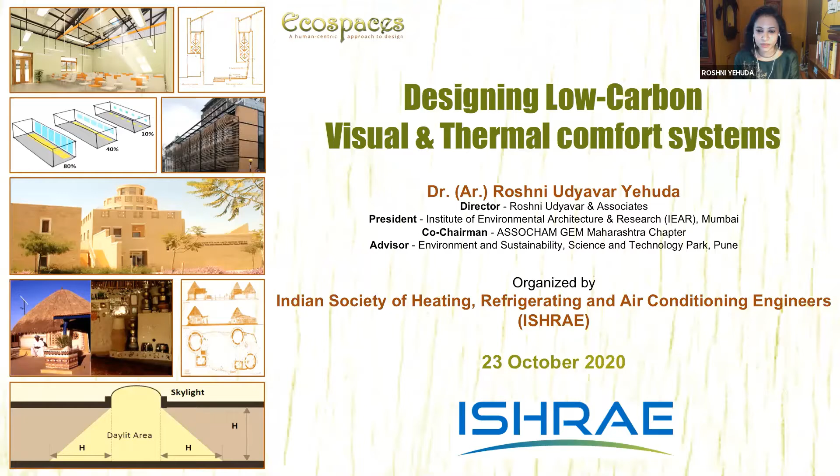The topic I'll talk about is eco spaces: designing low carbon, visual, and thermal comfort systems. By itself a very big topic, so please pardon me, I'll just be going through patches of it. What I'll cover today is a bit of background on why we need to do these things, energy efficient building envelopes, thermal comfort, visual comfort, and probably one case study. I actually had more, but I deleted most of it because I think we'll be short of time.

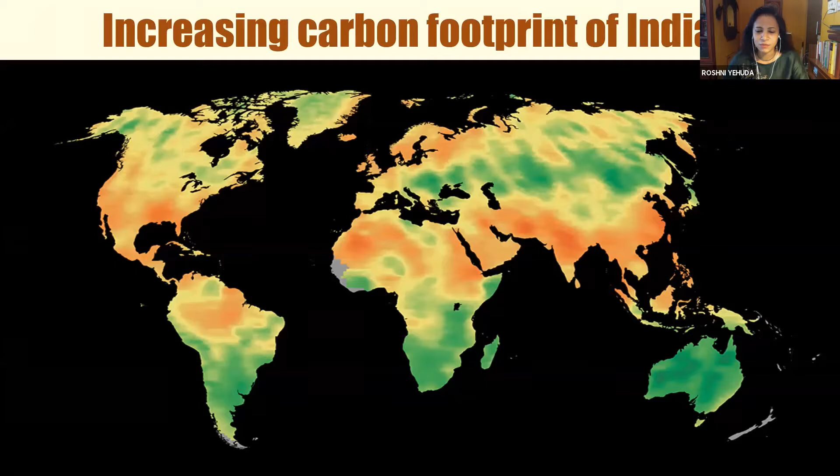So let me start by saying that the need for this is that we all know climate change is not just imminent, it is here. Being a developing country, our carbon emissions are on the rise. We are one of the topmost in the world, maybe fourth. If you look at China, it's almost reached the top now — it has gone past the US, and we are fourth.

That's even though our per capita carbon emissions are low; overall we are still very high because of the huge population. We know the effects of these carbon dioxide emissions: the glaciers in the Himalayas are melting, and overall this is causing a change in the climate of the entire Earth. All the ecosystems are getting affected, the oceans and everything. We can see it in the weather patterns. It's now a fact — no longer are people questioning it.

So if you look at the future, what are the challenges for us? The IPCC has shown us that if we want to limit global warming to 1.5 degrees centigrade, we have to follow a very drastic step down from our current levels.

This is our current level. If you want to limit the overall rise in global temperature to 2 degrees centigrade, which itself will have many global ramifications — many islands will be underwater, maybe even Mumbai — then we'll have to reduce to a certain extent. But if we go along the current path, we are definitely not going to survive.

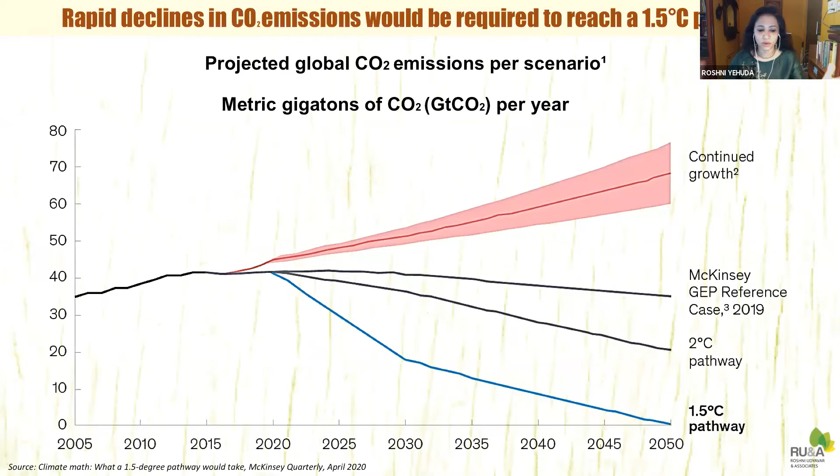So it seems we will have to make drastic changes, not only to our buildings but also to our behaviors — in every little thing of life. We'll have to move away from getting used to energy-rich spaces, and look at designing and making everything low carbon.

I just want to quickly give you some facts about India. Our floor space of buildings is expanding, and by 2050 we're expecting about 35 billion square meters of new buildings, yet 60% of that is not yet constructed. As per some older data, buildings still account for 38% of total electricity consumption, of which 28% is residential or domestic and 10% is commercial.

Some more facts about electricity consumption: the biggest rise is going to be in the residential sector, where by 2032 we're going to see that 37% alone is going to come from the residential sector. This increase is also because of the use of air conditioning for cooling and thermal comfort — fans and space cooling are today the largest, 33 to 65% of electricity consumption. Electricity demand due to the residential sector is going to keep rising.

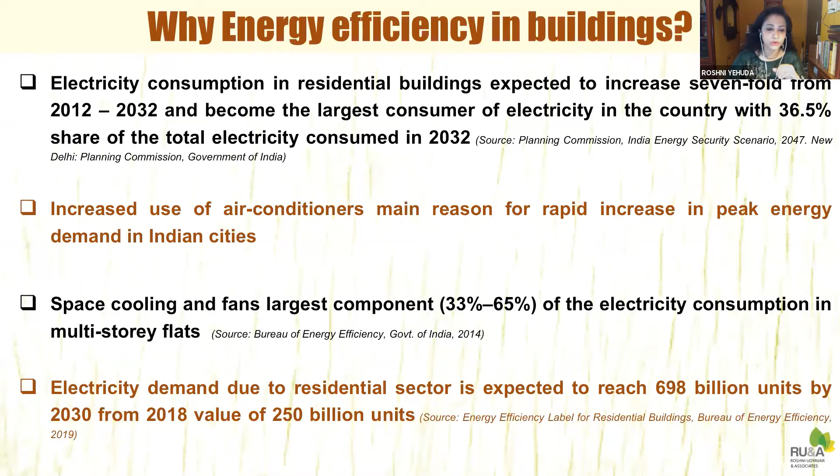Given the number of people we have to accommodate, people are going to move from villages to tier 3 cities, tier 2 cities, and so on.

Overall, buildings have many impacts, and key among them is energy consumption. During the operational phase, buildings consume a lot of energy, amounting to almost 50% of global greenhouse gas emissions. Apart from that, we haven't even counted the materials, the water we consume in buildings, and the waste generated — not only municipal solid waste but also demolition debris. So all of these are impacts of buildings.

So if you look at the built environment overall, it is next only to agriculture in its impact on Earth's ecosystems. So we — as architects, interior designers, MEP consultants, whoever — have drastically changed the face of the planet in many ways, and we need to change that. We need to reduce our fossil fuel emissions — oil, coal, and gas — and start designing low carbon buildings.

When we talk about low carbon design, especially with respect to thermal and visual comfort, I want to give a few areas you can focus on. One is the efficiency of the equipment we use—lighting, HVAC, computers—how efficient we can make them. The second part is the building envelope itself, which I'll talk about to a large extent today. The third part is to substitute the rest of the energy with renewable energy.

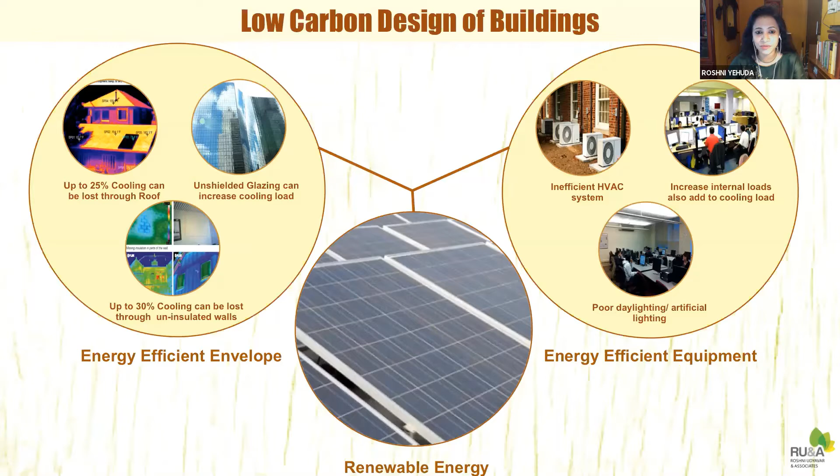I want to give a larger framework for how you can make low carbon buildings. The building has to be made as per the climate of the place—then it will definitely be low carbon because it responds to the climate, so it's not just a block that can be fitted anywhere. It responds to the thermal and visual comfort of the occupants, so it's not a generic design. Finally, how we can reduce and eliminate non-renewable energy and go for renewable energy—this is the whole perspective we're looking at.

In terms of the building envelope, just to give you an introduction—the envelope is like a third skin. Just like our body needs to be balanced in terms of thermal energy, we have our own skin, then we have clothes, and then we have the building. That building is like a third skin, exchanging heat from the environment based on whatever is outside, following the simple laws of thermodynamics.

Depending on the outside temperature, the building either loses or gains heat, and a balance needs to be maintained. A structure that doesn't lose or gain a lot of heat, and remains in balance, is a structure that will consume less energy.

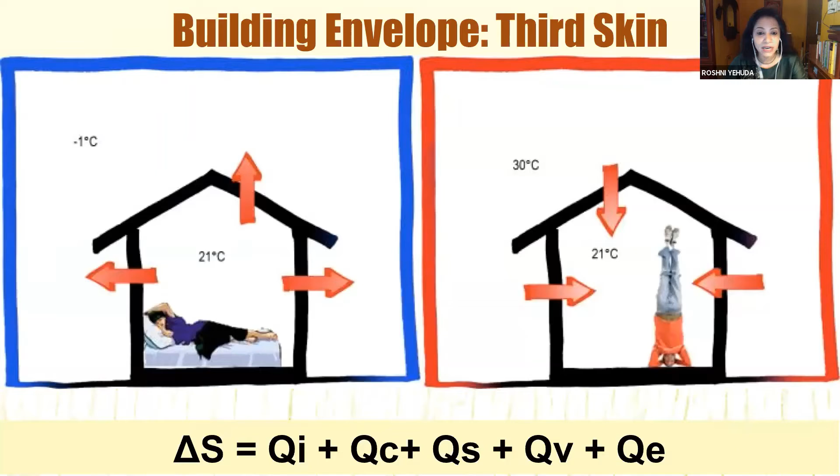If you see our own buildings of the past, we had these huge massive walls in our villages—like 2 feet thick, made of mud—and the heat could never reach the other side. By the time it would come somewhere to the middle, it would have to go back. So basically, thermal lag was used as a means of making buildings thermally comfortable.

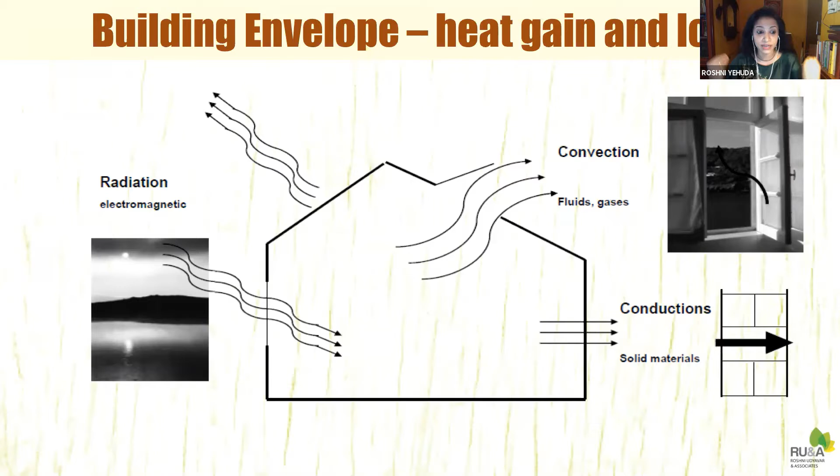I want to go a bit more into the building envelope and give you some important facts and concepts in building design. The building envelope—the floor, walls, windows, roof—keeps exchanging heat with the surrounding environment by three processes: conduction, convection, and radiation. Basically, the heat source is solar radiation from the sun, short wave radiation, which is either absorbed by the structure and emitted, or received directly through the windows, along with convectional movement of the air.

In the design of the building envelope, there are several things that can be done. For example, you already know about shading devices, which can make a drastic difference to direct heat gain inside your building. Then you can have a proper U value, or thermal transmittance value, for your walls, roofs, and windows—I'll talk to you about that in a bit.

You also need a proper solar heat gain coefficient. You can decide the window-to-wall ratio—if you recall, in Rajasthan we have smaller windows, while in Kerala the walls are almost all windows. So there's a different pattern used everywhere, and that's nothing but the same concept of window-wall ratio we're talking about. And of course, orientation—having the right orientation wherever possible—is very important.

The internal layout is important too, because if the habitable spaces are not in the direct path of the heat zone, that will be much better. So if you have buffer spaces like balconies, verandas, or even toilets or staircase blocks, that's another way of looking at it—that's the spatial layout.

So in terms of walling materials, I want to give you a brief background. So far, this is what we use: fired clay bricks, which we've been using since Mohenjo-daro and Harappa, and concrete blocks, which is currently in practice but not at all good. We also have Mivan shuttering kind of walling, which extensively absorbs and retains heat inside structures. We have hollow concrete blocks, somewhat better than concrete blocks, and then AAC blocks, which came up in the last decade or so and is probably today the most energy efficient material in the market.

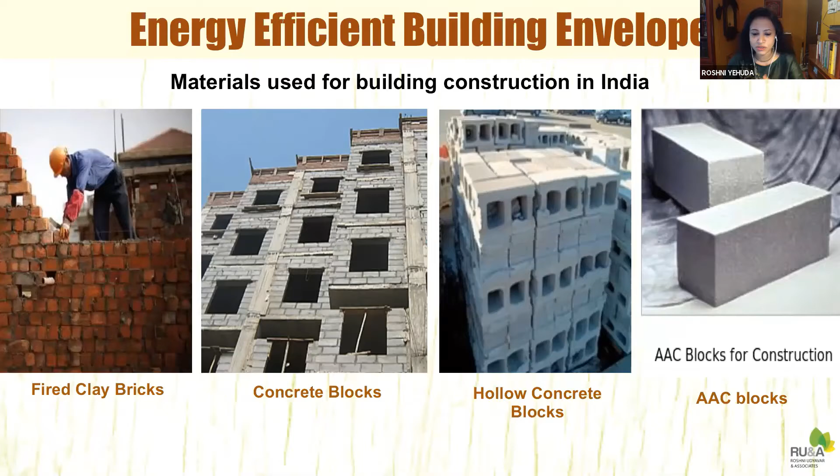But AAC with insulation comes down to 0.4. So it's very important to get this value right in your building in order to keep the operational energy of the building low. You'll automatically see that when you use the right materials, the building's energy consumption comes down.

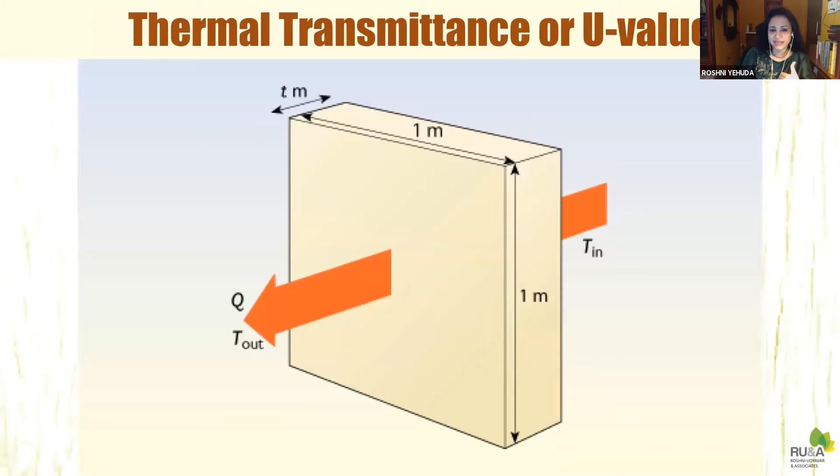So I want to give you a little bit about thermal transmittance, or U value, which is basically the amount of heat energy that gets transferred by one square meter of wall of a certain thickness, given a one degree centigrade difference between the two sides. U factor is defined as heat transmission in unit time through unit area of a material, and it also includes the thin air film on both sides of a material - whether walling, glazing, or roofing - which is taken into consideration in this U factor.

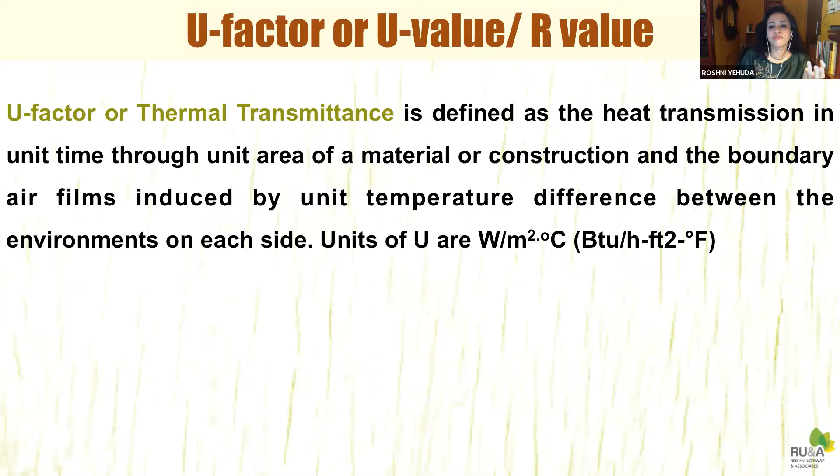So basically, U factor is one criteria which takes into consideration conduction, convection, and radiation effects. Therefore it's a very appropriate, easy way of finding out whether a material is good or not in terms of thermal behavior. The way we calculate U value is by calculating thermal resistance, which is the exact opposite of thermal transmittance.

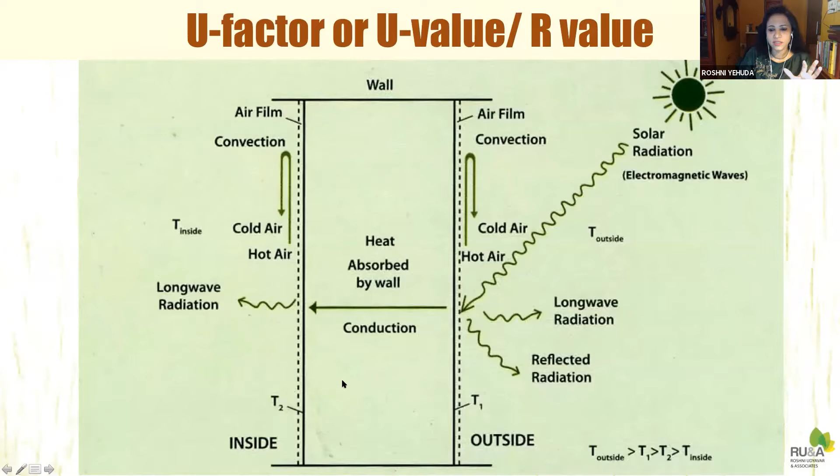So here you can see a wall, and this is the shortwave solar radiation hitting it. This is the thin film of air which has its own temperature and effect. Some part gets reflected, which is not our concern. Some part gets converted to long wave radiation, which is a concern because it becomes heat. Most of it gets conducted inside the material itself, heating up the entire structure, and the rest goes inside, emitted as another type of long wave radiation, which is also a concern. So this U value takes most of these things into consideration, and therefore it's considered an appropriate value.

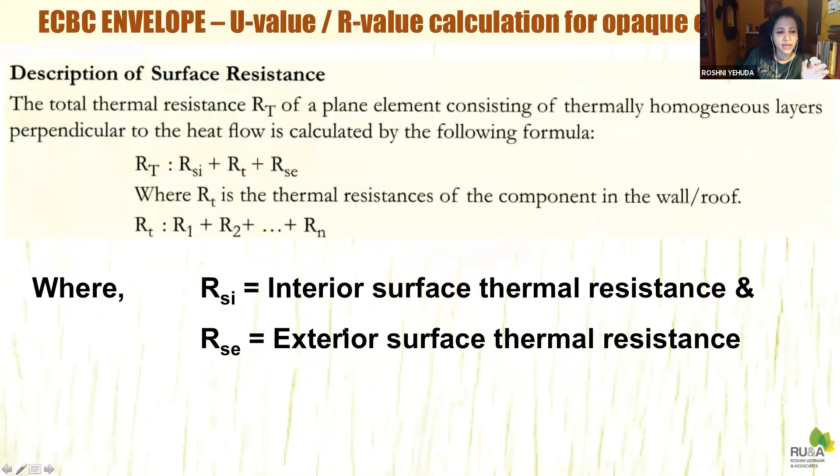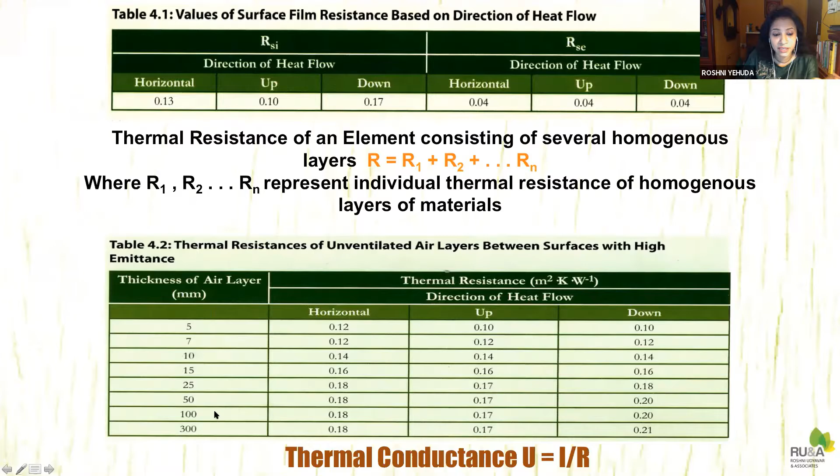Now the calculation of U value goes by calculating thermal resistance, which is directly proportionate to the thickness and inversely proportionate to the thermal conductivity of the material. So R equals D upon K. Without going into the details, you also add RSI and RSE, which is the thin air film resistance provided by the air film next to the walling. These are the values given by the Energy Conservation Building Code for RSI and RSE, and if you have a cavity in between, those values of thermal resistance are also provided in ECBC.

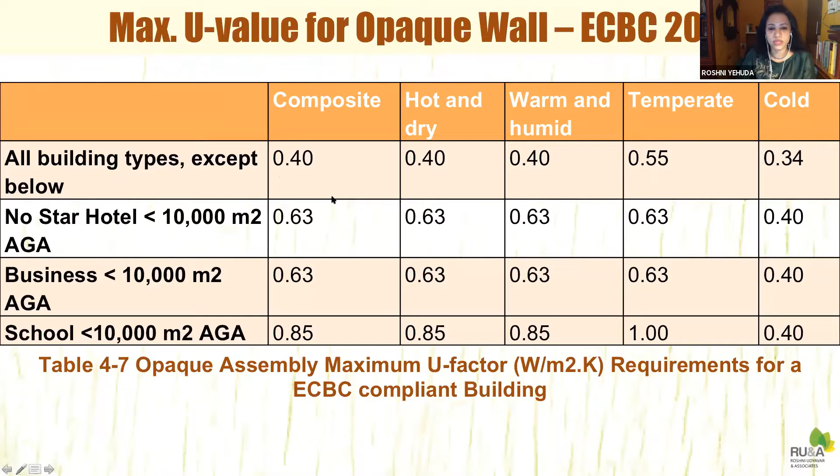Just to give you a quick chart of the values given by the Energy Conservation Building Code 2017, you can see that 0.4 is given for most climatic zones. For temperate, we have a slightly higher value, and for cold regions, it is slightly even lower than these. So this is what ECBC prescribes.

Another important factor related to roofs is the solar reflectance index. Again, it is the amount of heat energy which gets directly reflected. It also includes somewhat the effects of emissivity and reflectivity, and it's a range between 0 and 1, or it is also expressed as a percentage.

For example, if you have red colored tiles, the reflectivity is 30 to 50%, meaning 30 to 50% of the heat energy gets reflected. Whereas if you have dark asphalt, bituminous sheet, or some kind of paint, then it is between 10 to 20%. Or if you have whitewash or white paint, which is high albedo reflectivity like snow, then this is 80 to 90%. So that drastically reduces the overall amount of heat coming inside the structure.

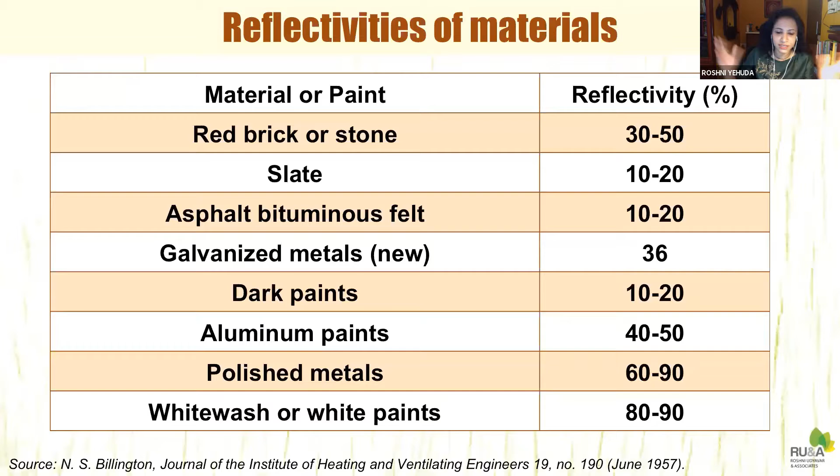That means 70% of the heat should be reflected. And if you are not providing a painted surface or something, then you have the option of providing greater than 50 mm high vegetation covering the entire roof.

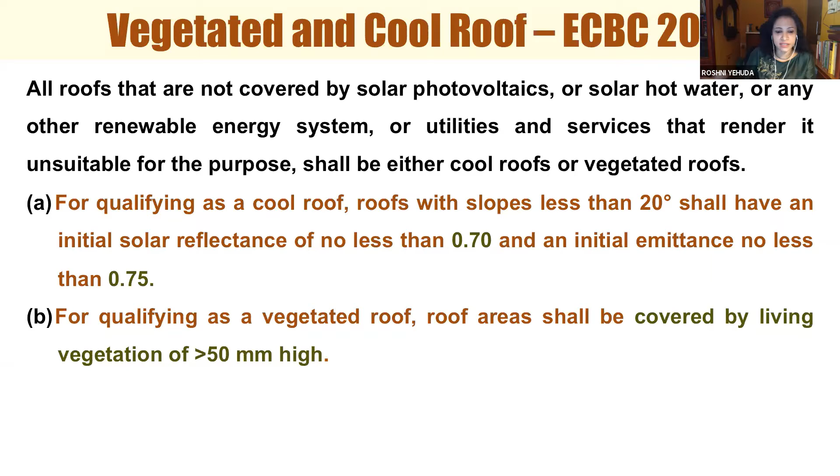So you can do various things here. For example, you can have an extensive garden on your roof, or a small lawn covering the roof, or you can use China mosaic, which reflects the entire energy. Or you can also have radiant barrier materials under the deck of the roof, or even on the other side. So you have various options for making your roof.

Remember that the roof is the largest horizontal surface taking in heat energy. Not so in the case of high-rise buildings. In high-rise buildings, the walls become really important.

Now coming to windows, I want to tell you that in windows also we look at U value as a benchmark for finding out how good that window material is. Here I want to show you an example: if you have a 4 mm float glass, the U value of that is 5.8.

If you estimate that 40 degrees centigrade is the outside temperature, this provides very little resistance. You can see the inner temperature is 39 degrees. So there is just a 1 degree drop in temperature.

As compared to that, if you take a clear DGU, double glaze unit, which has 4 mm glass, a 12 mm gap, and another 4 mm glass, that brings down the temperature to 36 degrees. The U value of this is 2.9.

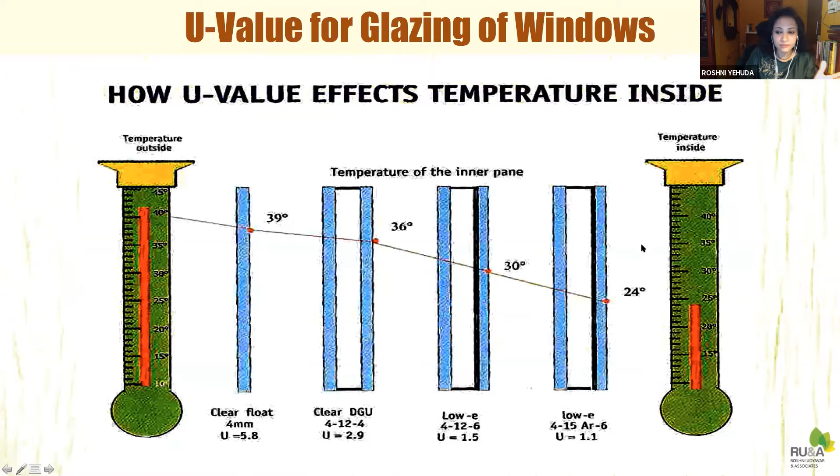you can do lots of things by having a glazing of the correct U value. In many cases, you may not be able to avoid glazing today. In the past, we did not use glazing much, but today as we are going higher, we need the view factor, etc. Therefore, if you want to put a lot of glazing, it is best to restrict it to at most 40% or so, as ECBC prescribes. But if you go higher than that, at least you need to ensure you have a proper U value, and in any case, you can have a good U value for the glass.

The second most important thing with respect to the glazing material is called solar heat gain coefficient, which is related to the direct solar radiation, and it's a ratio of how much heat is outside and how much is inside from the solar radiation. So it's again a value between the range of 0 and 1, and it takes into account all of these aspects: the direct radiation, what is absorbed, what is reflected, what is re-radiated, and everything.

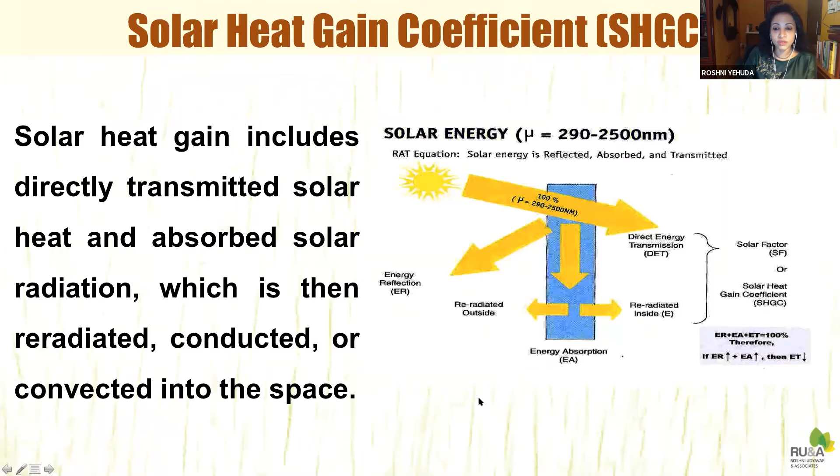So when we think about buildings and how we orient them, what is really important is the orientation of the openings and the glazing. So if you can protect your openings by providing the right kind of shading, then the solar heat gain coefficient will be low, and that is what you need. You definitely require more than the U factor. In the case of windows, what is important is solar heat gain coefficient.

The third important thing is window to wall ratio, which is, given a certain area of the wall, what is the percentage of window. So window area divided by wall area will give you the window to wall ratio. And it can be various percentages. So in a warm and humid climate, probably it is best to have more windows, good cross ventilation, etc. Whereas in a hot and dry area, you may want to have smaller windows. That's what window wall ratio is about.

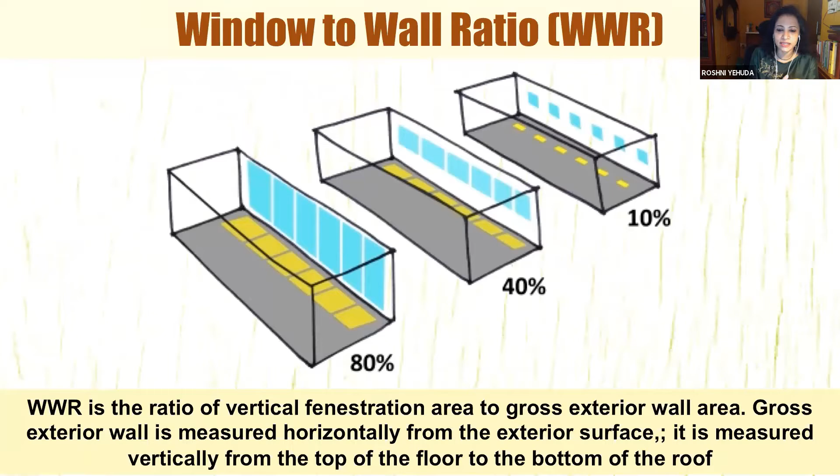The next thing is visible light transmission. How much light can transmit from a window? And this is again a percentage of how much light is outside and how much is coming inside from the glazing. And again, it's a value between 0 to 1 or 0 to 100%.

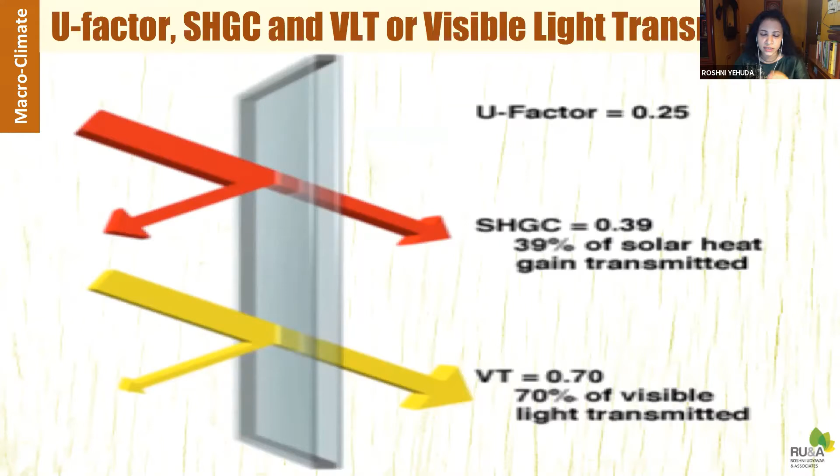So if you take a glazing, there are three very important things. One is the U value, which we already saw, the rate of heat transmission; the solar heat gain coefficient, which is the direct solar radiation entering inside; and the third thing is the visible light, how much light you're getting inside. Remember, the U factor is the non-solar heat. It's based on the difference in temperature.

So this is how I would summarize it. U value is the rate of heat transmission, solar heat gain coefficient is the heat gain due to radiation, and VLT is the rate of daylight transmission. So we need less U value, less SHGC, and more VLT. This is a typical glazing performance chart, and you can see I've highlighted the light, the solar heat gain coefficient, and the U value.

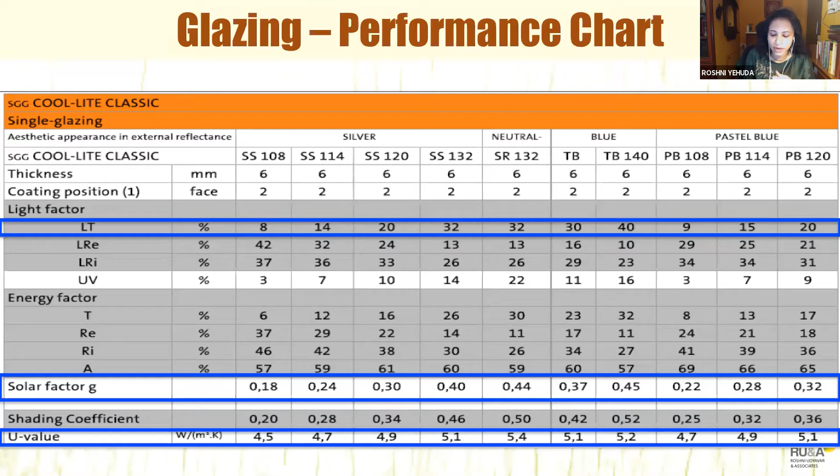And you definitely need to strike a balance here, because some glasses will provide very little light transmission, like 8%. Their solar heat gain coefficient may be also low, but we don't want so little light coming in, so at least 20%. So you need to strike a balance and select your glazing such that you will have low solar heat gain coefficient, low U value, and high light transmittance.

The role of shading, as I have already told you, has one main purpose: it will reduce your overall heat gain, and it is characterized by a projection factor of the shading device that you can design. And most architects can design a shading device if they know two very important angles, the horizontal shadow angle and the vertical shadow angle.

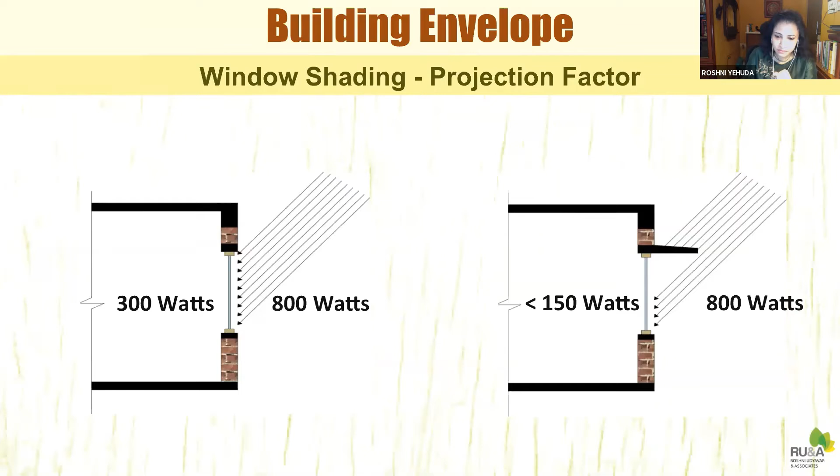And you can see from this diagram that if you provide a shading device, you can directly cut off a big percentage, almost half of the direct solar radiation coming inside. And if you want a certain amount, you can design a shading device which is retractable, movable, or flexible. So as I told you, you can design your shading device if you know these two simple angles, vertical shadow angle and horizontal shadow angle, which can be easily found for any latitude, any place.

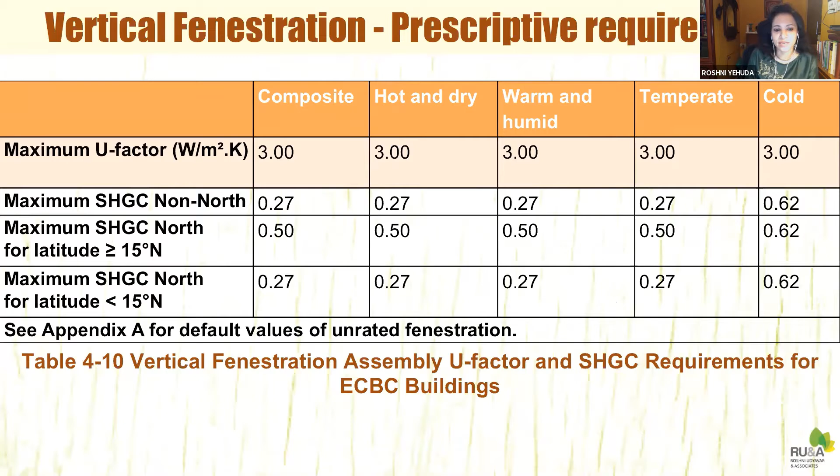As far as vertical fenestration is concerned, I also want to show you what ECBC prescribes. The maximum U factor is given as 3. If you buy a typical glass off the shelf from a vendor, the U value may be as high as 7, so what ECBC prescribes is 3. This is quite difficult, but that is what is expected. Similarly, solar heat gain coefficient is about 0.27, that is 27%. So to summarize, we should have a window to wall ratio which is less than 40%.

Visual light transmission should be about 0.27, and the rest of the things I've already mentioned to you, the SHGC, the U factor, and all of those.

Coming to the next aspect, that is thermal comfort. So I just want to quickly take you through some of the important concepts. When we design buildings, we want to design them for comfort of the occupant with respect to all of these aspects: visual, acoustics, spatial, thermal, and animate. Thermal comfort is just one of the aspects, and it's not necessary that if you provide thermal comfort, all of the rest are also done. So you need to be aware of this fact.

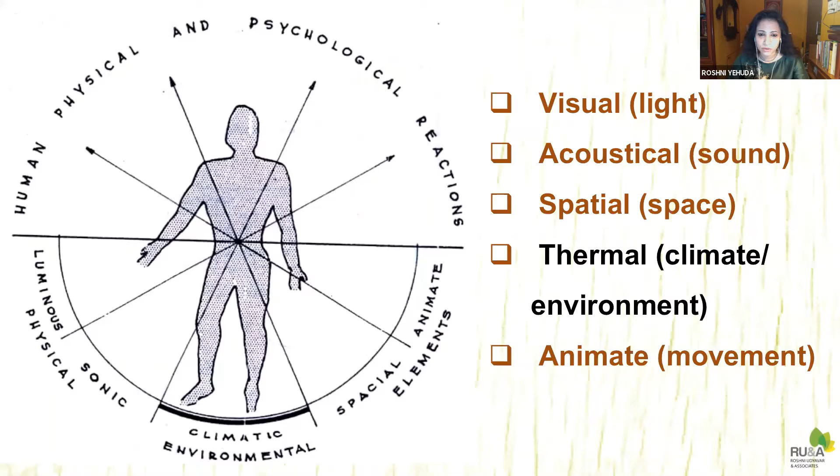And we as human beings have ways of exchanging heat with the surrounding environment, and it is based on the activity levels, whether you're sleeping, whether you're sitting on the computer, whether you're doing a workout, or whether you're doing an office activity or whatever it is. So all of these things are very important.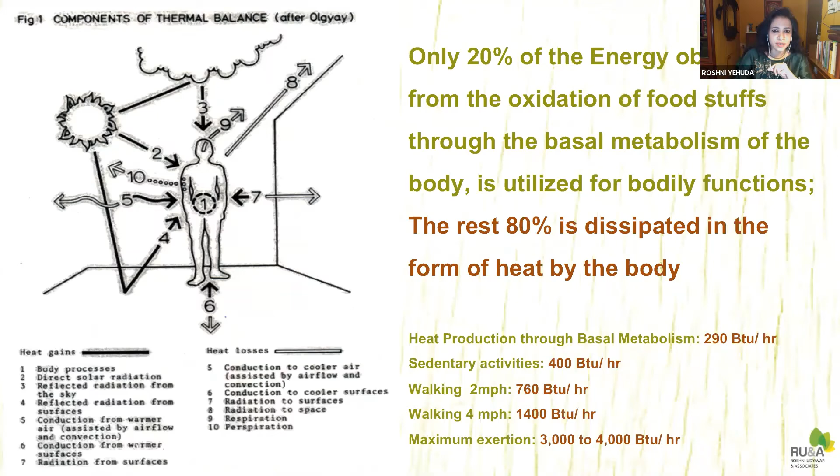For a very long time, there was a search by scientists as to what could be called a comfort zone, wherein people feel comfortable. Can buildings be made for a particular comfort zone? And it was found that a comfort zone is one where people have maximum productivity. They are able to do most of their work without feeling exhausted, tired, and so on. That's because the external environment is not playing a role in their physical comfort.

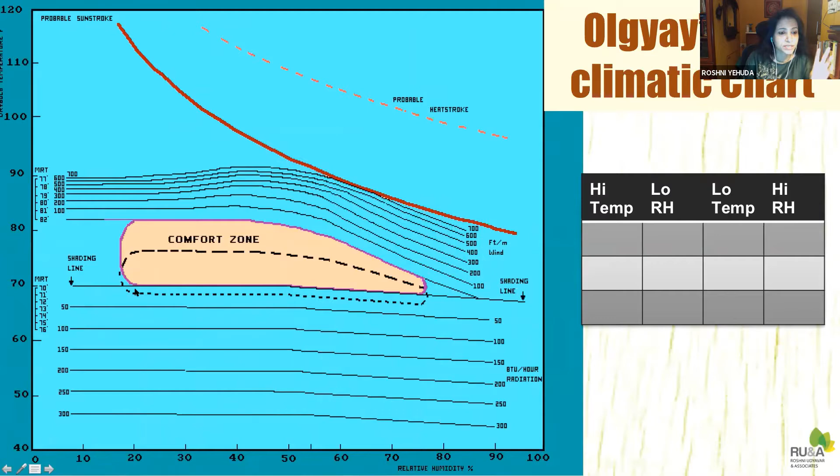So this is one of the first charts designed by Olgyay, which shows you two aspects, that is relative humidity on the x-axis and dry bulb temperature on the y-axis. And this area in the center was the comfort zone. Of course, this was originally designed for the USA, but Olgyay also prescribes how to change it for tropical climates. All you need is to mark your particular place using high of temperature and low of humidity, and you will know what you would need to do in your particular place.

For example, some places you would not need shading, you would need solar radiation a lot. In some places you would need to provide wind. In some places you will need to provide moisture. So there are different recommendations for thermal comfort by this particular bioclimatic chart, but there are many more climatic charts that have been done. ASHRAE describes thermal comfort as a state of mind that expresses satisfaction with the surrounding environment.

So although we have spoken so far about feeling physically comfortable, basically thermal comfort is a mental state. It's a state wherein I feel comfortable or you feel comfortable. There are different variables of thermal comfort, that is metabolic rate and clothing insulation. These are the personal individual variables. As far as the environment variables are concerned, we have air temperature, radiant temperature, air speed, and humidity. And there are other secondary factors as well.

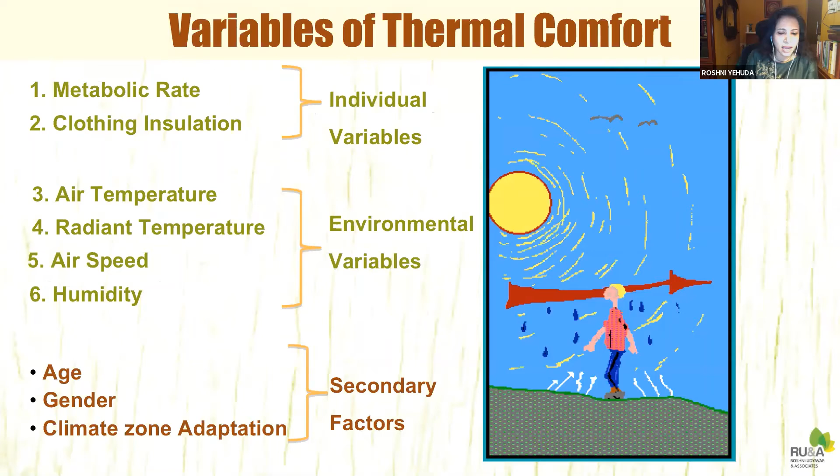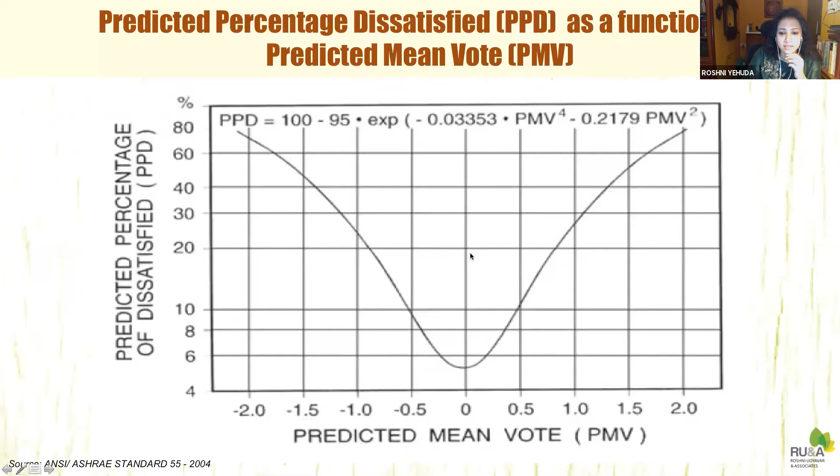And what it says is that the percentage of people who would be dissatisfied would be only about 10%. So they would fall in the range of 0.5 to minus 0.5. Most of the people should be here. There may be a few people in the higher range of -2 or +2, that is they're feeling too warm or too cold, whereas most of the people should feel in this range, that is neutral, warm, and cool. So this is the general requirement. It says that the percentage of people dissatisfied, PPD, is less than 10, and the range of PMV is between minus 0.5 to plus 0.5.

So it also has a comfort zone here as well, wherein you have operative temperature on the bottom, you have humidity ratio, and you have a thermal comfort marking. And these are for different clothing levels, what you're wearing. So if you're wearing a jacket and a suit, it's called 1 clo. If you're wearing summer clothes, like a shirt and pants, it is called 0.5 clo. So this is the PMV graph for finding out the comfort. So you can find out whether a particular place is in the comfort zone or not.

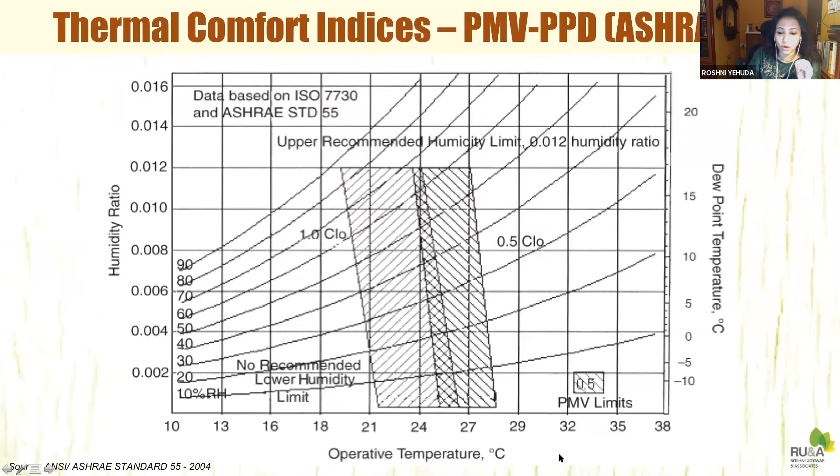In case of India, the National Building Code provides 3 different indices for measuring thermal comfort, and this is given in the NBC 2016 as well. There are 3: the effective temperature nomogram, the tropical summer index, and adaptive thermal comfort.

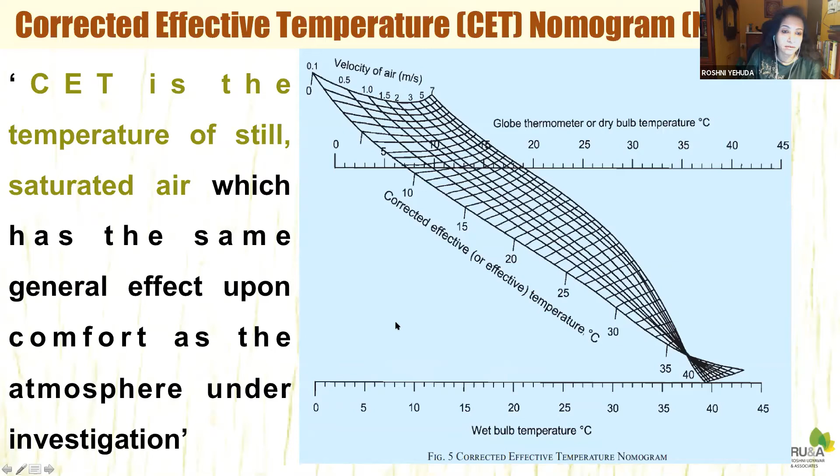So the nomogram that we have for CET also has a small part which is marked as the comfort zone. And then it has a velocity of air, it has the globe thermometer, which is basically taken using the globe temperature, the thermometer, and it is marked over here. And then you have the corrected effective temperature, which is here. So you will have to mark the 2 of these and then connect the line, and you'll have to find out what is the effective temperature because of the particular conditions, maybe the wet bulb, the dry bulb, and everything together. So this is one of the ways of finding thermal comfort levels in the case of India.

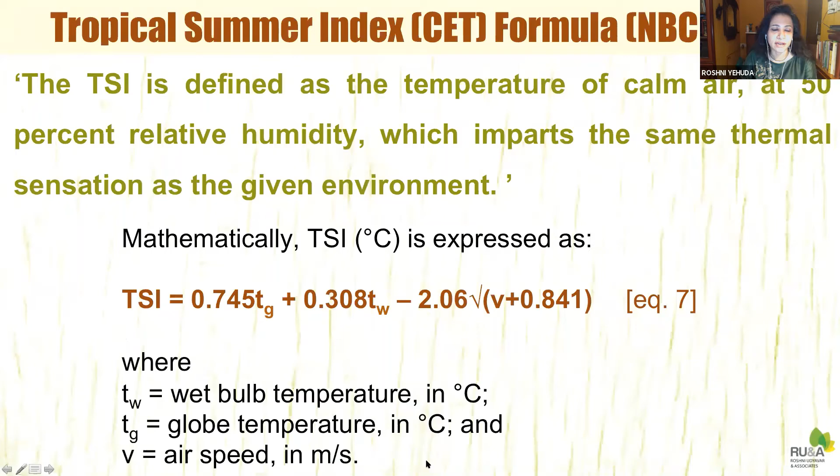The second and more suitable one is the tropical summer index, which I have used extensively, which includes, for example, the wet bulb temperature, the globe temperature, and the airspeed in meters per second. So this is another way of finding out, and the TSI value for that particular place or building will have to be between the range of 25 to 30 degrees centigrade. Optimum value is considered as 27.5, and there are limits of between 19 to 25 degrees centigrade on one side, and 30 to 34 is the extreme limit. So these are tolerable ranges on the hot side and cold side. So the tropical summer index is a very huge range of comfort levels.

So it even goes beyond the latest model that has been developed in India, which is called the Indian model for adaptive thermal comfort, created by CEPT and several other people. But now it is included in the NBC. And you can see that for naturally ventilated buildings, for different types of buildings, the values for the operative temperature, that is the neutral temperature, are provided in the IMAC.

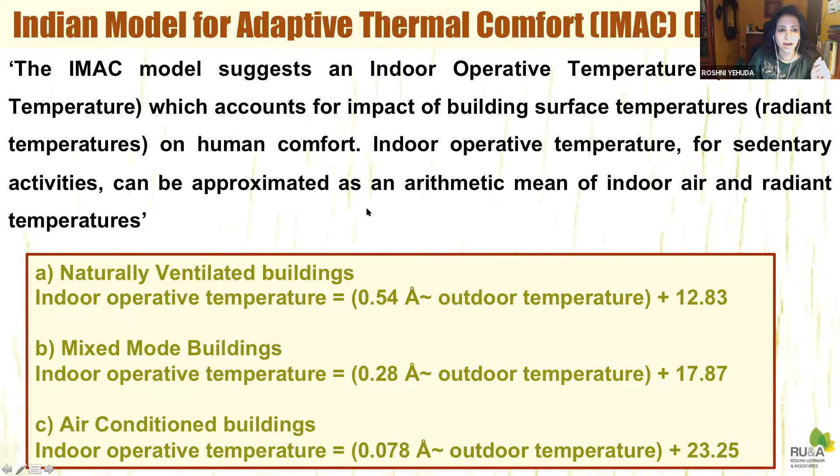Coming to visual comfort, there are 2 aspects, daylighting and artificial lighting, both of which I'll just quickly refer to. Before that, a few points that are important to understand is the illuminance, that is the light source. Every light source, whether it is the sun or an artificial bulb, will give out lumens, and what falls on a surface is lumens per square feet, which we either call foot candles or lux. And luminous intensity is the intensity of the lumens coming out of the source, and what we perceive at the eye is the luminance in candela per square meters. So all these are some of the basic terminologies.

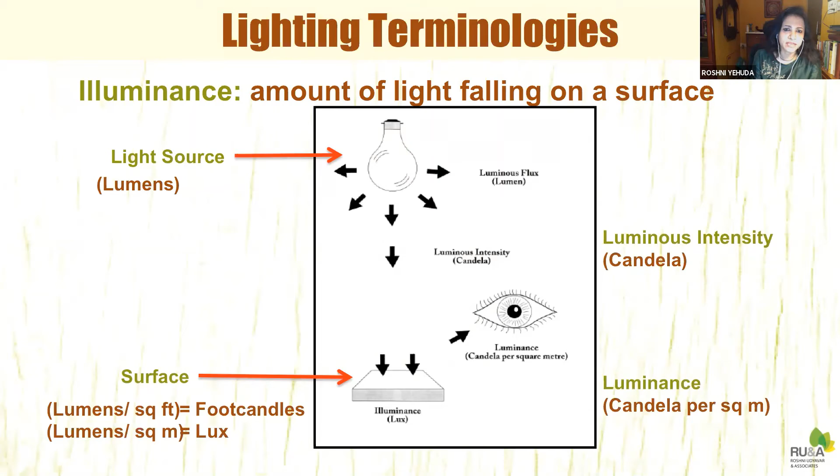Now, when we talk about visual comfort, what is required is that we have adequate levels of illumination. That is a certain lux level that is recommended for that particular task. There should be uniformity of illumination. There should not be glare. Glare is an excess amount of light falling from some source, which disturbs your eye. There should be adequate contrast. There should not be too much contrast. The colors should be as is required for that particular place, and there should not be a stroboscopic effect, a movement of light. So this is what is required for visual comfort.

So let me talk a little bit about daylight, which is basically the controlled admission of natural light into a space through windows. So we have the freedom of designing daylighting, and daylighting can be designed very accurately if you want light inside your buildings. And why we need to have daylighting is that it's a free source given to us. It's just available. The second thing is that it affects our circadian rhythm and the biological clock. If we are not next to a window and we're sitting in a place which does not give us an idea of what is happening outside, then that can be quite disturbing to our biological clock, just like when we face jet lag and so on.

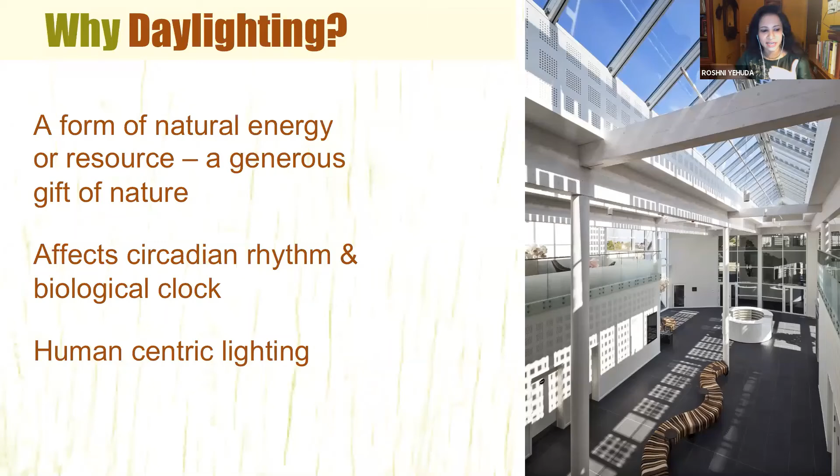So all of this together comes under something called human-centric lighting, which basically includes three aspects: health and well-being of the person, an efficient lighting system, so energy reduction, and also aesthetics. So all of these things are the goal of a good daylight design.

I would start by giving you a few terminologies or some idea of how to design.

One is the daylight factor, which is similar to the solar heat gain coefficient. It is a ratio between the interior and exterior illuminance—a percentage of how much light is outside versus how much is coming inside from your window or opening.

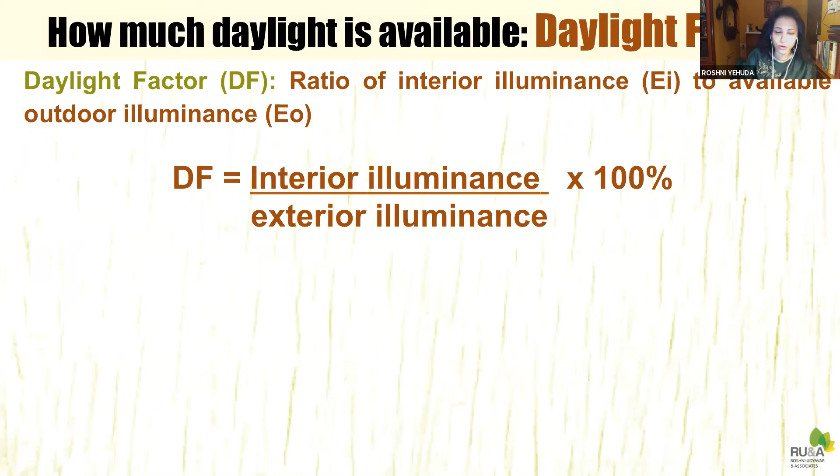The National Building Code gives various levels for daylighting, and it says that the level should be based on the clear design sky, a sky without any clouds, and should be taken at the level of a working plane, both outside as well as inside.

It has already given values for outside design sky illuminance for different climatic zones of India. If you have the interior lighting levels measured using a lux meter, you can immediately calculate the daylight factor. However, when you want to design something, you can do it using the daylight factor formula.

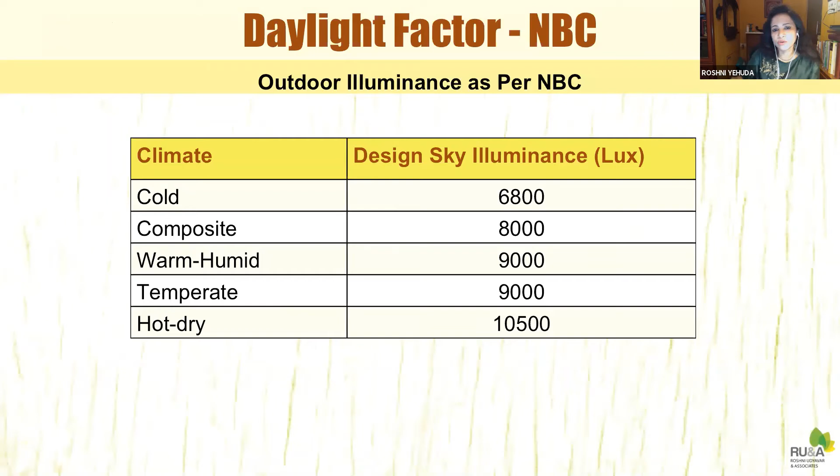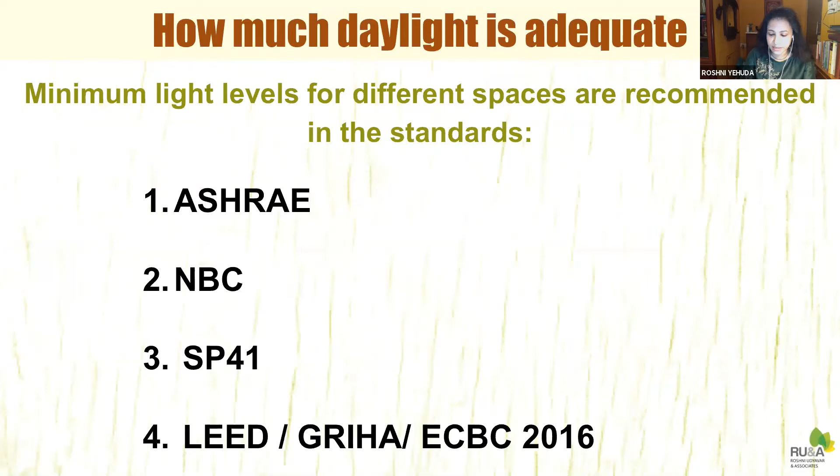The levels of adequate daylight for a given space are given by various sources, including ASHRAE, NBC, SP41, as well as various other rating systems, and also ECBC.

If you see the National Building Code, for each place you will see three values always given. We have to always take the central value because these are for extreme conditions. The higher value of the range is used when there is unusually low reflectance, when accuracy or higher productivity is required, and the visual capacity of the worker makes it necessary. The lower range is also taken for special cases. So what we need to take is the middle value as the required value of illumination for a particular place.

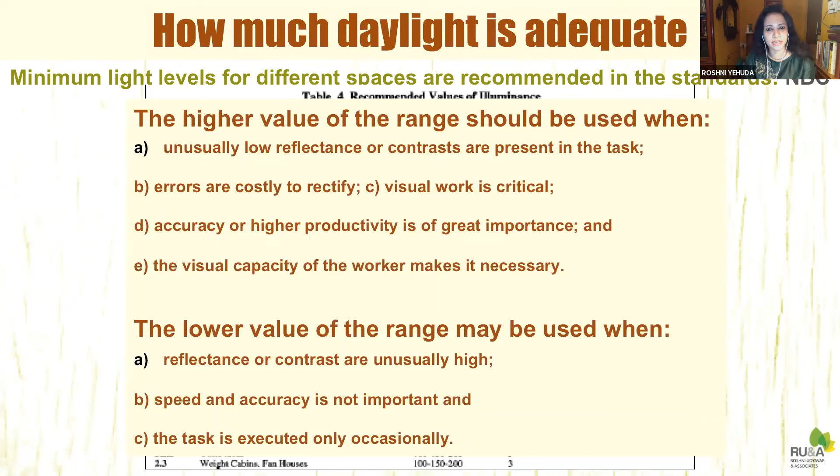You can see this is from one of the DCRs, I'm not sure which one, but this also shows you how much lux levels we must have for our interior spaces.

The daylight factor, when designing for a new building, can also be calculated. It has three parts. One is the sky component, and that is why for designing a daylighting window, the sky is a very important aspect—we never get daylighting directly from the sun. Daylighting is always indirect from the sky dome, so however much you can give an opening towards the sky is much better.

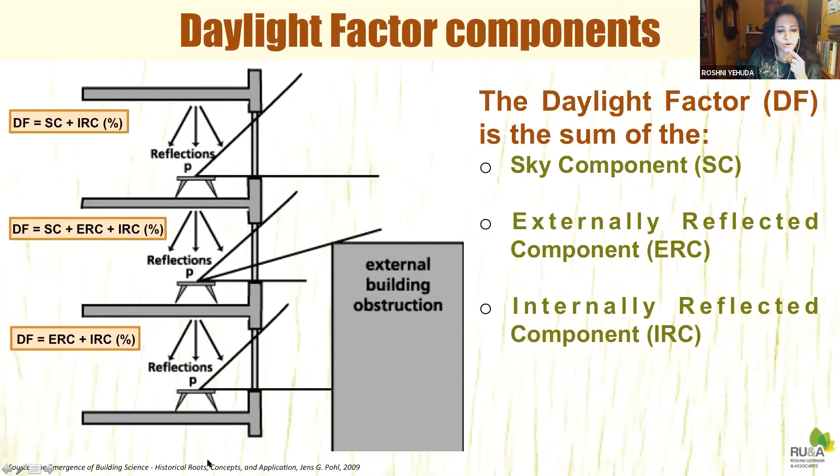You will also notice that in older buildings, the lighting windows were higher up, and that is one of the reasons. So there is a sky component, there is the internally reflected component, and sometimes there is an external disturbance, like an external building or obstruction, then there is an externally reflected component as well. Generally speaking, these would be the different cases for different types of windows or flats.

There is a formula for how to calculate the sky component, and it's very simple: H by D and W by D. There is a table from which you can actually obtain the values of the sky component.

The second important thing is orientation. It is recommended that windows should face north or south. You should always provide daylighting windows at a higher level, like about 2 meters, and you should have interior surfaces that are able to distribute the daylight in the interiors.

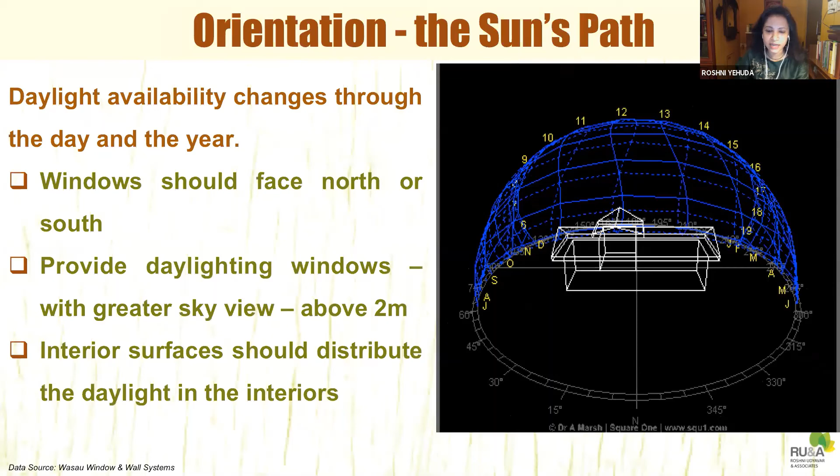In interior spaces, there are many ways to increase the amount of light by providing light wells, by providing atriums, by providing various other skylights, and so on.

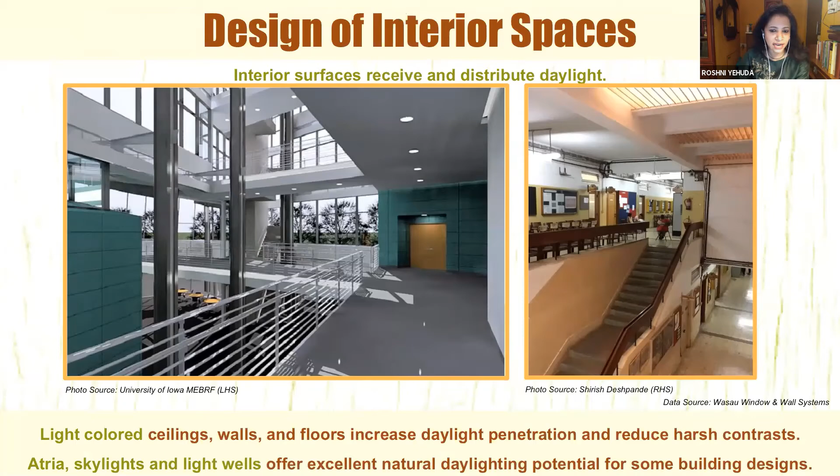Sometimes it is impossible to get light inside your building, and at that time what you can do is provide light pipes. I've not seen this much in India, but it is very extensively used in northern European countries, etc., where you generally have an overcast sky.

So you have light pipes which simply work on the principle of internal reflection of light, and they provide light—even from moonlight you can get good light inside the building. You see this is an actual light pipe. There is no light actually, but here is the dome, and through internal reflection, you have a silver colored lining through which inside this pipe light gets reflected and comes out as light inside the corridor or some other space deep inside the building.

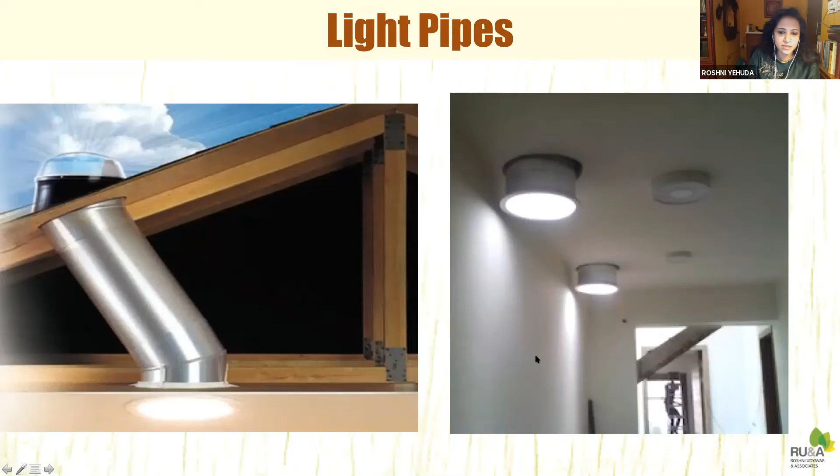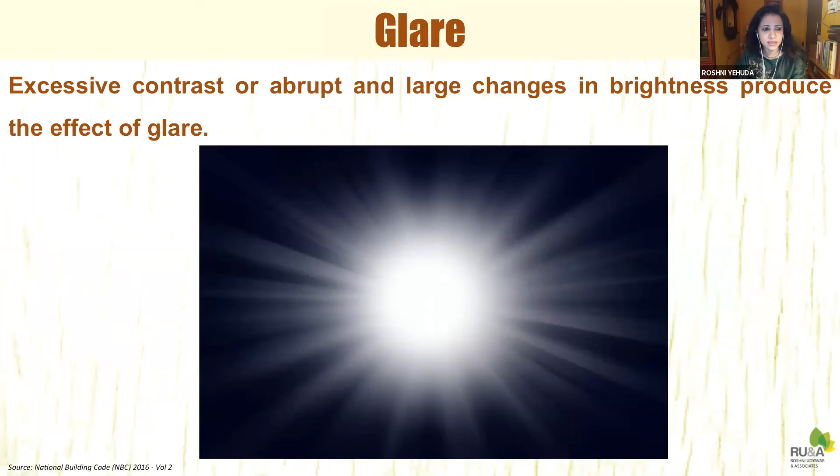Glare is to be avoided. It is excessive contrast or abrupt large changes in brightness that create glare. You can have different types of glare: directly coming in, or reflected from your computer screen or a glass surface, or something that comes from behind, which is called veiling glare. All of these things are to be avoided in a good daylight design.

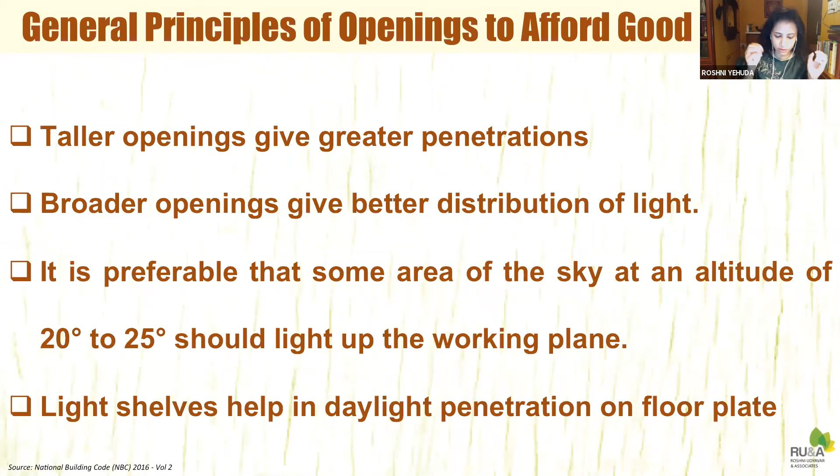General principles of lighting say that broader openings give you a better distribution. Taller openings are useful for throwing the light further in. Use of light shelves will definitely help, and having a window with sky at an altitude of 20 to 25 degrees is one of the best ways to get daylighting inside the work plane.

In terms of artificial light, I don't think we have much time, so I think maybe I should go a little bit fast on this.

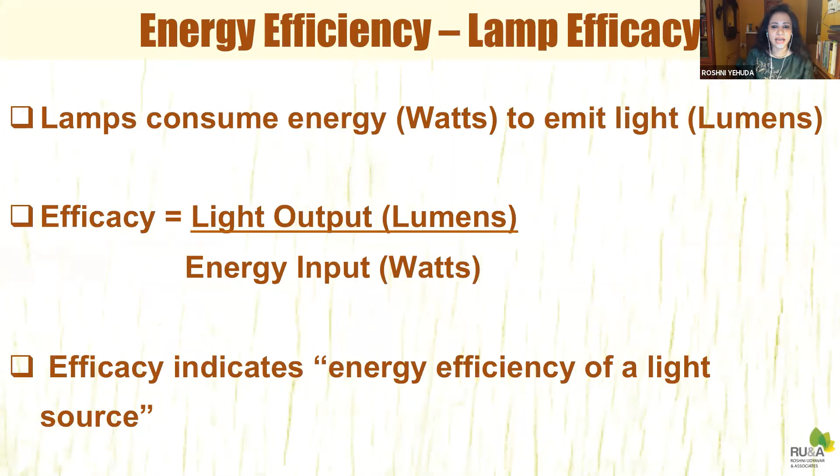Efficacy of the lamp is an important aspect, which is basically the division of the lumens, that is the output of the lamp, divided by the wattage of the lamp. So you can have different efficacies, and I'll show you a few examples.

There's also a concept called correlated color temperature. As I mentioned, we feel good when there is a warm light or a cool light, depending on various circumstances. So all types of light sources have this aspect, that is color temperature, and the color rendering index, which is how naturally they occur or can be seen in nature, and how this source of light is able to produce it. It's a range between 1 to 100.

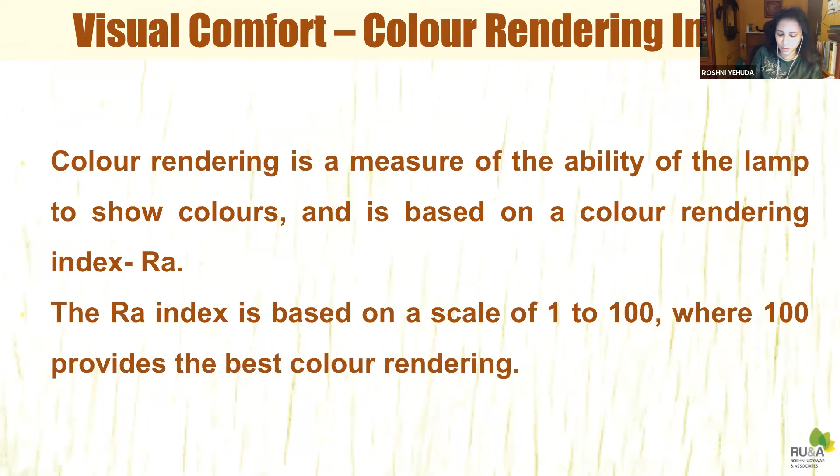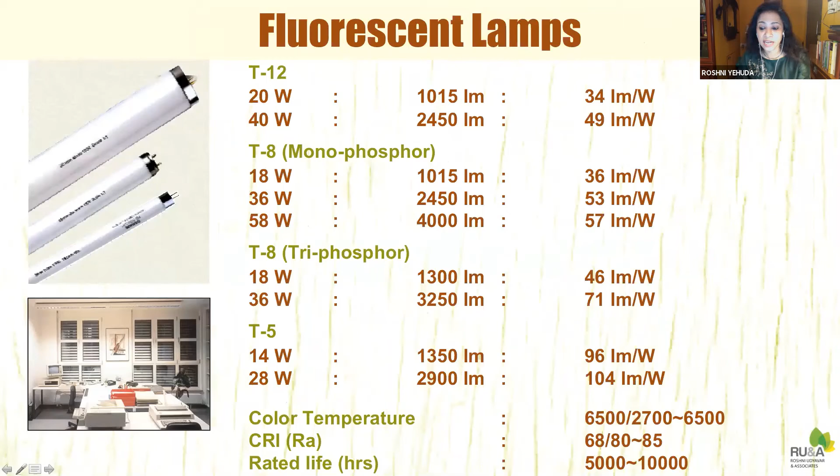If you compare this with fluorescent lamps, you can see definitely the efficacy is much more. A 28 watt T5 is providing 104 lumens per watt. The rated life is up to 10,000 hours. Even the heat to light output ratio is slightly better.

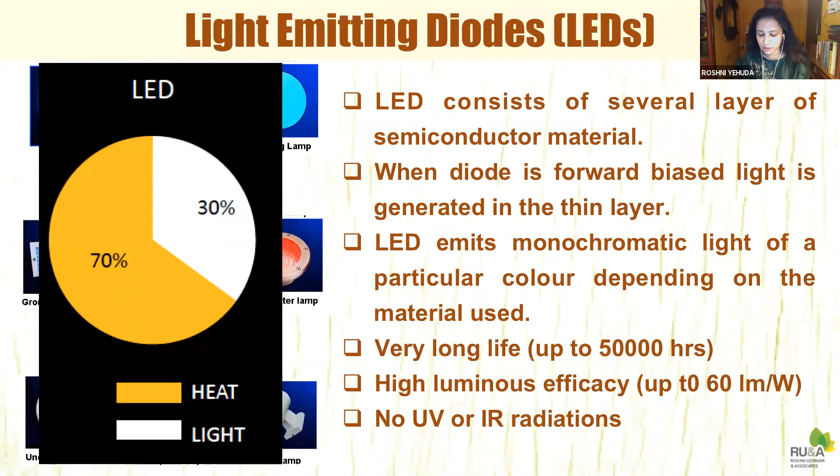And right now what we are using is LED lamps. This is the LED lamp ratio for heat to light output. The best thing about LED is that it is not using any kind of gases. So for end of life disposal, definitely LED is a better option.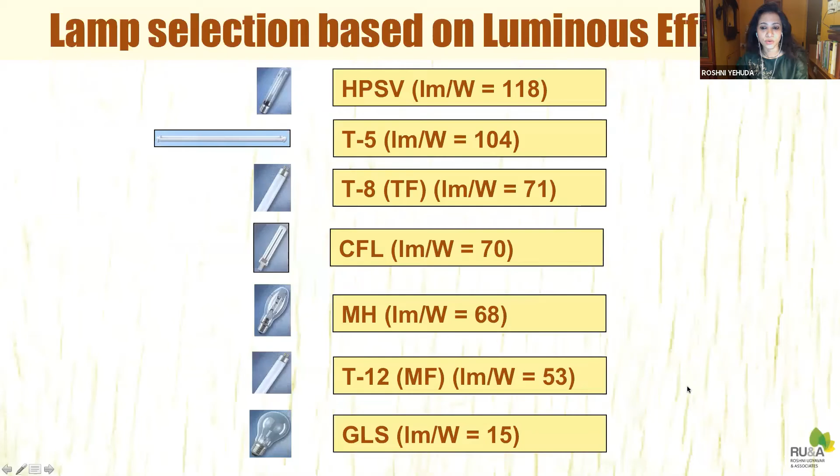Apart from lamps, there are also luminaires, that is the fixtures that are used for putting the lamps, which can create a much better effect of light and create better visual comfort as desired.

And also the ballasts, which are required to start the lamp in many cases, especially when they are gas based. Even LEDs have ballasts. So they also contribute to the consumption of electricity. Therefore we must be careful that we have electronic ballasts, not electromagnetic.

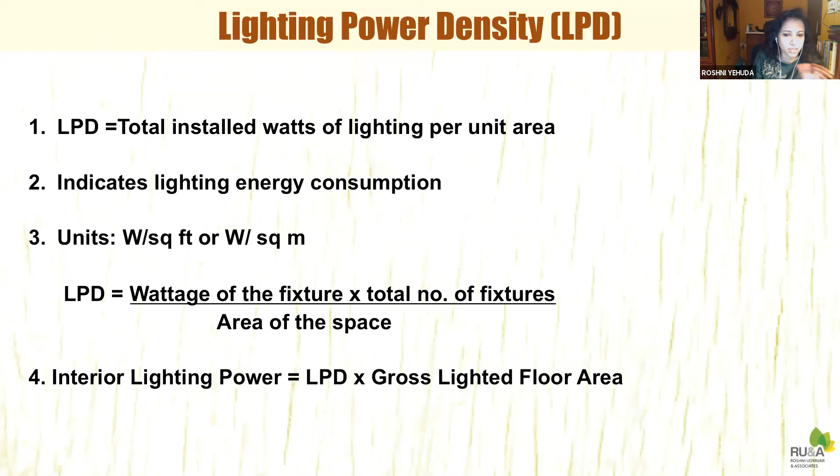And the last concept in this is the lighting power density, which is related to the amount of lights per square meter of space. So here also there are certain standards. This is given in watts per square meter, and ECBC also prescribes for different types of buildings what should be the LPD, the watts per meter square.

I don't know if I should go ahead. There's one case study I wanted to share. Saloni, is that okay? Yes, yes, definitely, of course.

Okay, so this is the last thing I thought I'll share: if all of these things that I've discussed with a small case study. It's an actual thing where I had done the post-occupancy evaluation. So basically, low energy comfort systems are used when we go beyond this.

This is all when you can do passive design and all of that. But beyond a certain point, you have to have some kind of cooling system. And that's where low energy thermal comfort systems can be very useful.

So there are various ways by which you can provide low energy thermal comfort. You have solar chimneys, wind scoops, trombe walls, PDEC systems, geothermal cooling, and thermodrain. So what I'm going to show you is the thermodrain system.

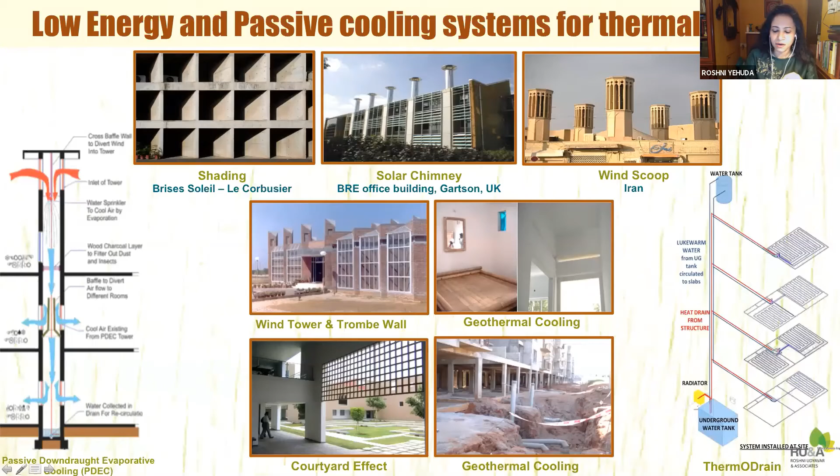This has been used in this particular case study. It's an office building in Nashik, ground plus 2-story. Total area of the terrace is 2000. Total area is 2,834 square feet.

So some basic features of this building: it's a rectangular block. The architect is Sanjay Patil, and the design of the cooling system has been done by Panasia Engineers. I analyzed the architectural features of it, and I found that it has a perfect ratio in terms of its length and width.

South, in case of Nashik, has a common wall generally with the neighboring plot. That's also good because south brings in a lot of heat as well. It had an atrium on the north, which provided adequate daylight.

The window to wall ratio was 37%, which was much below even the latest benchmark of 60%. And the window glass was laminated, so it had a low U value.

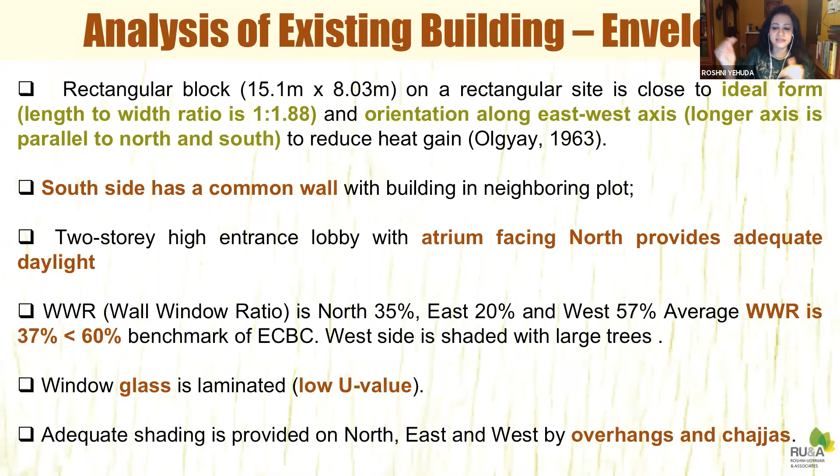The entire design was made with overhangs and chajjas, so all of the windows were well protected with respect to direct solar radiation. Windows on the north also faced an open space, so there was a good amount of breeze. I noticed there were different windows for bringing in the breeze inside, and they also had some kind of turbo ventilators on top to activate the stack effect.

Indirect natural light was there throughout the office. The external walling system was also interesting. It had a double wall with fly ash bricks on one side and red bricks from Gujarat, which were mainly for the cladding, with no plastering on the outside.

Turbo ventilators provided the stack effect, and high albedo solar reflective paints were used on the terrace, so they also reflected the heat. These are some pictures.

You can see this is the south common wall from which the architect tried to bring in light also. This is the western side, which generally has a lot of heat, but you can see because of the surrounding trees, context is very important.

This is the conference room on the top floor. This is the atrium facing north. This is the west side chairman's cabin. And this is the front facade where you can see a little bit of the brick cladding that was there.

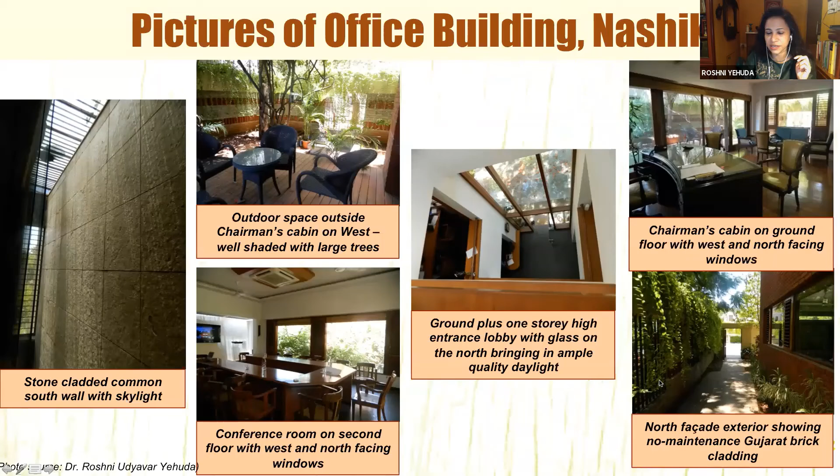So this is the thermodrain system, which comprises these pipes which are laid out. I'll just show you the 21 mm dia plastic pipes laid out at a grid of 0.3 meters center to center. They were designed to remove 242 BTU per square feet per hour of heat.

The thermal conductance of the pipe in the grid is 4.5 watts per meter square, and the total heat removed by the pipe is 77 BTU per hour.

The water picks up the roof heat and passes through a radiator that rejects most of the heat. Lukewarm water is stored in an underground tank. There was an existing tank which was made use of for this in the basement, and that was used for the water that was being circulated throughout the entire building for the system.

This is also based on a sensor which checks the temperature of the water, and when the water is warmer, the whole cycle starts again and replaces the water. So basically it is meant as a structural cooling system, which is cooling the structure throughout the day and also at night by means of night sky radiation and also the radiator, both of these.

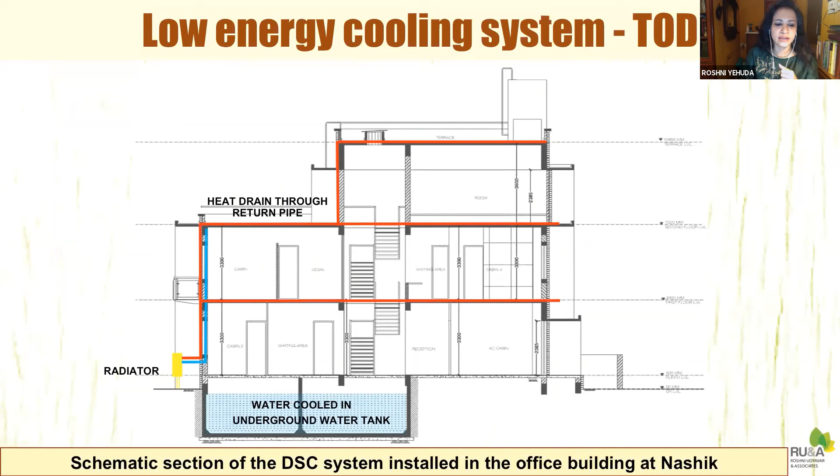So this is the cross section again showing how the system works. There is rejection of heat, there is a radiator, there is water in the tank which circulates to all the slabs, and that gets water from the tank as well. This is how it works.

These are actual pictures at the time of construction, after construction, and currently showing the radiator and the ground, etc.

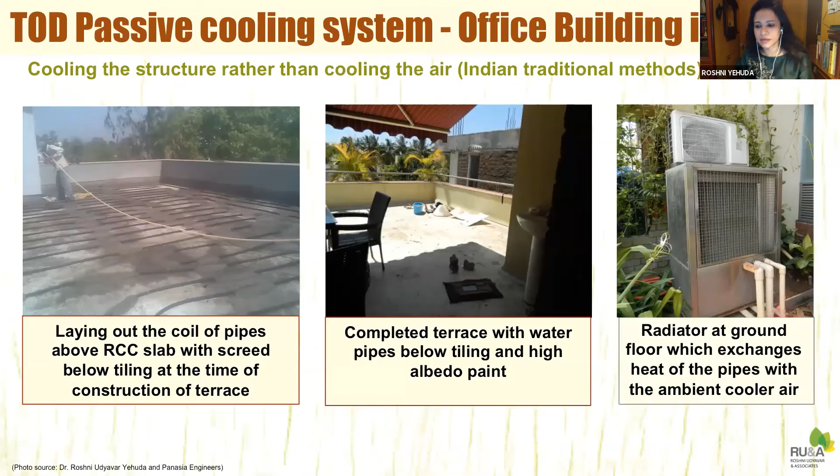We did the study for 24 hours, 25 hours actually, in the peak of summer when it was fully occupied. I want to share with you the results with respect to all the thermal comfort and everything I've been talking about.

If there is 33 degrees centigrade in the room, then we are not going to feel that coolness - the heat is not going to exchange. There's no heat exchange happening.

We also found that people were generally walking around bare feet, so the coolness of the structure was an important factor. The structure was not radiating any heat during the day - it was radiating coolness, and therefore people generally got the feeling of coolness in the structure.

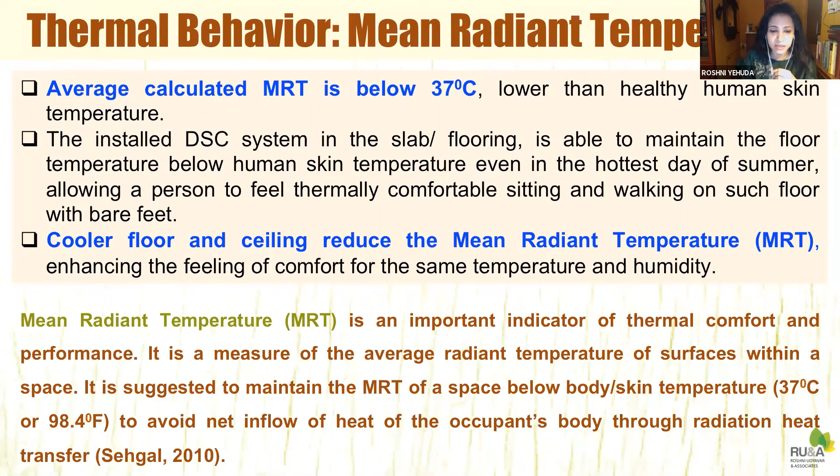For thermal comfort levels, surveys were also taken. People generally felt very comfortable in this space. However, that was not enough for us, so we decided to look at the indices that the NBC provides.

We looked at all of them, and here are the remarks on which ones we rejected. For example, IMAC required some 30 days of running outdoor temperature data, so we could not choose it. Effective temperature, the NBC itself said was not valid for certain spaces. ASHRAE was not valid beyond 30 degrees centigrade.

So we chose the Tropical Summer Index as a tool for checking whether this place has the right values or not. When we calculated the average values from that 25-hour study, we found we got a value of 27.4 degrees centigrade.

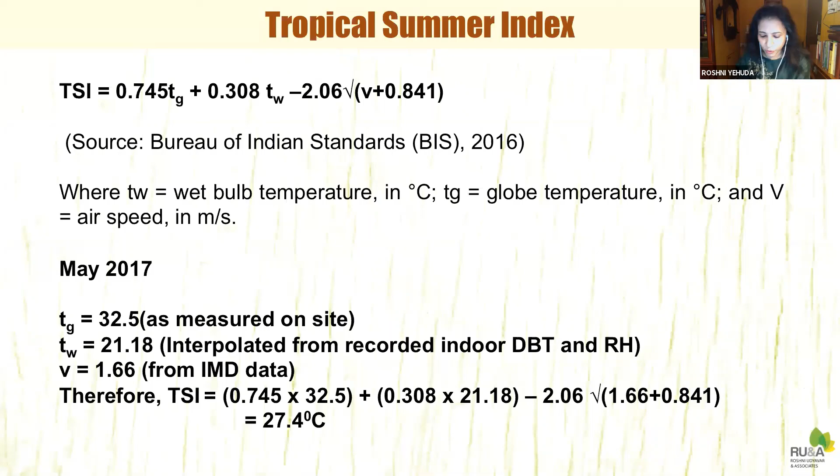If you recall, the acceptable range for TSI is 25 to 30, with an ideal value of 27.5. What we got was 27.4 - that was really good. It explained that this structural cooling system was working and is acceptable.

We also decided to check their electricity bills for one year, and we found their energy performance index, the kilowatt hour per meter square per year, was 26.5, which is very, very low. Even your own residence might be something in the range of 40 or 50. So for a commercial office building, 26.5 is way too low.

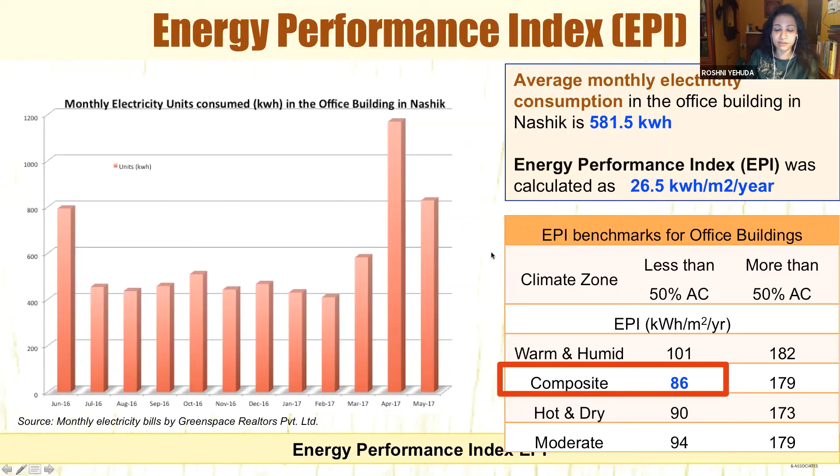That was proof of the entire thing - that said everything. If you compare this with the benchmark given by the Bureau of Energy Efficiency for a composite climate, it should be 86, and believe me, even 86 is very difficult to achieve. But this is 26.5, so they're way beyond that in terms of achieving thermal comfort and EPI.

Finally, some basic calculations: if you look at the capital cost, this system was 50% of the conventional. In terms of energy cost, 8.7% of the conventional. The cooling energy consumption was less than 10 times, and the life cycle cost for 10 years was 1/5th the cost of conventional. So definitely in terms of cost also, it's a very low energy system.

I want to summarize that what we're trying to do with all these things is reduce our overall impact and give back to the environment - make our buildings net zero in terms of energy, waste, and water. I'll show you one example, Paryavaran Bhavan, which has achieved net positive status, meaning it gives energy back to the grid. I think this is what all buildings ought to do.